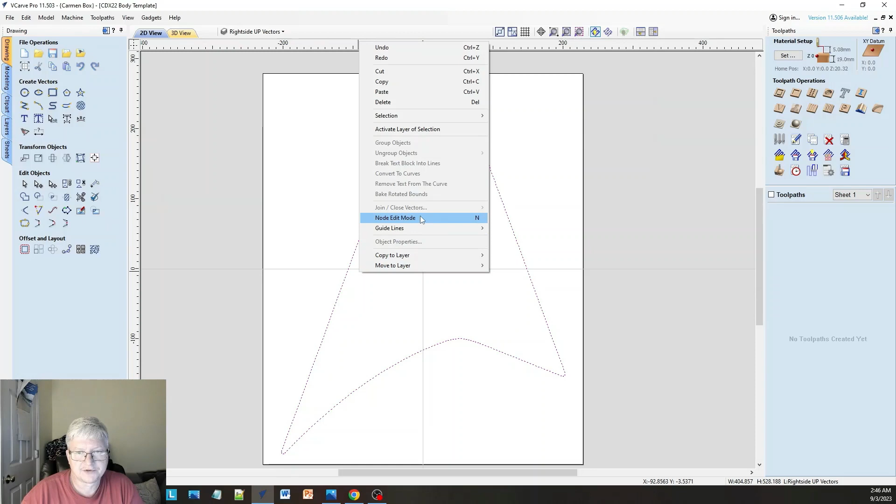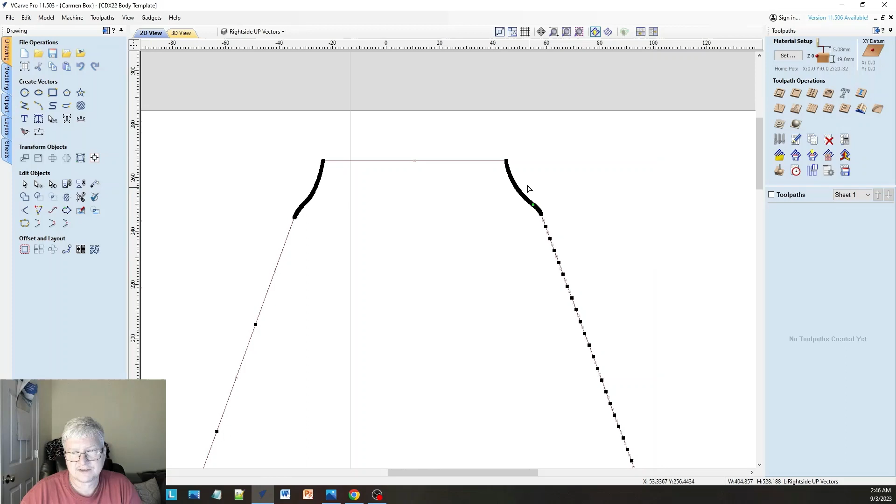This is very similar to what you guys had if you followed along. I'm going to take these vectors that we imported and go to node edit mode. If you look, you see all this garbage - this should be a straight line, but you see all these points, tons and tons of little lines and arcs. We need to get rid of that.

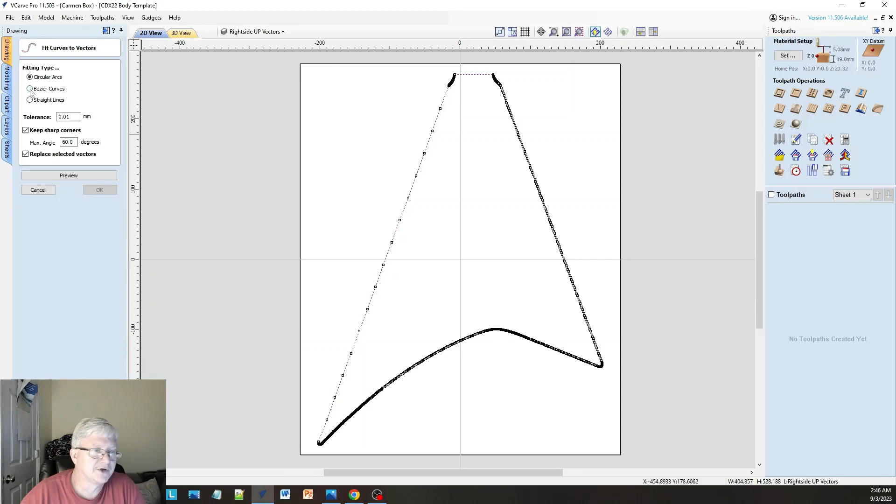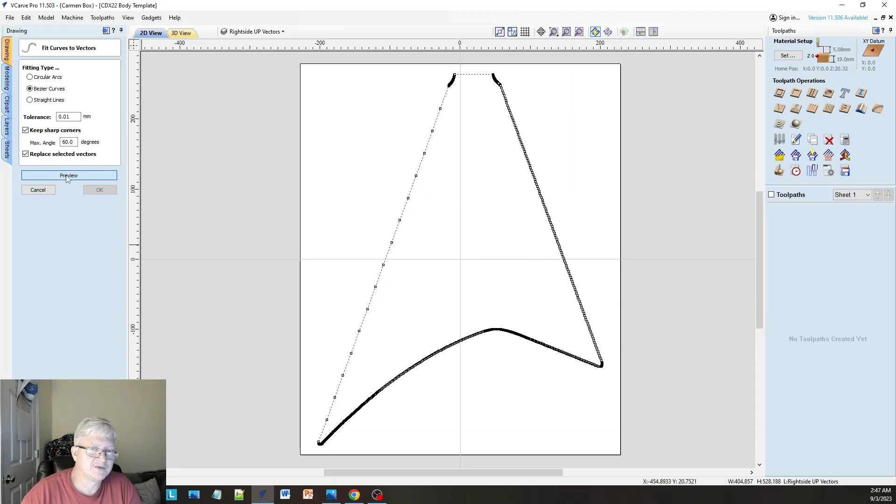How we rectify that is we highlight the vector, then go over to this tool here, the curve fit tool, and click on that. We're going to select Bezier curves and leave the tolerance at 0.01 millimeters. Some things you don't really have to be this accurate, but I like to leave it that accurate. I also like to select replace selected vectors. So we click this preview button, and this is what the software will convert the imported DXF curves to, and I'll hit OK.

Now if I click on that again and go to node edit mode, we have something really nice to work with.

Another thing I want to mention - you guys may not need to do this unless you're doing like me and repairing a guitar. If you traced a unit and followed along and just want to build your own guitar, you can go ahead and generate your toolpaths based on the video you followed in part 2. Just go back and do this - that's the only change you have to make, and you wouldn't have to do the engraving.

I'm doing engraving for a different reason. I'm repairing a Jackson X Series V, model number CDX22, that has a broken upper wing. For me to do a good job on this, I need my template to fit the body pretty good. It doesn't have to be exact, and it can be a little proud - the template can be a little proud of the body, but the body cannot be proud to the template.

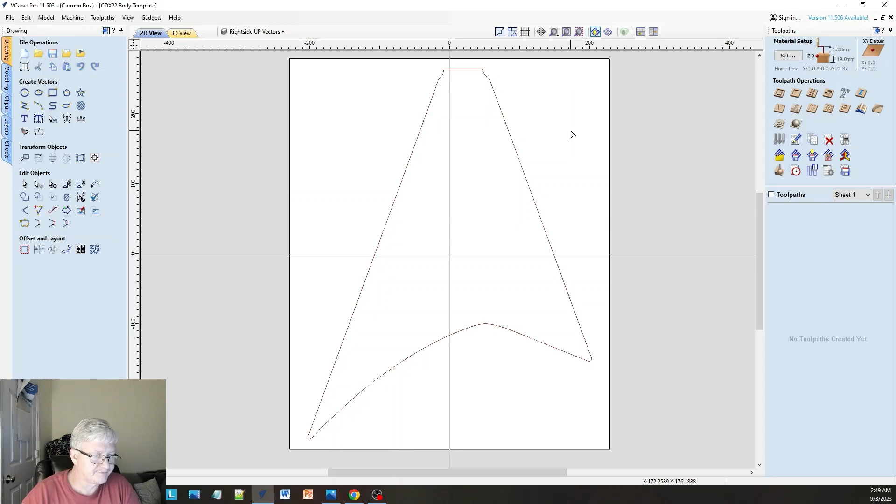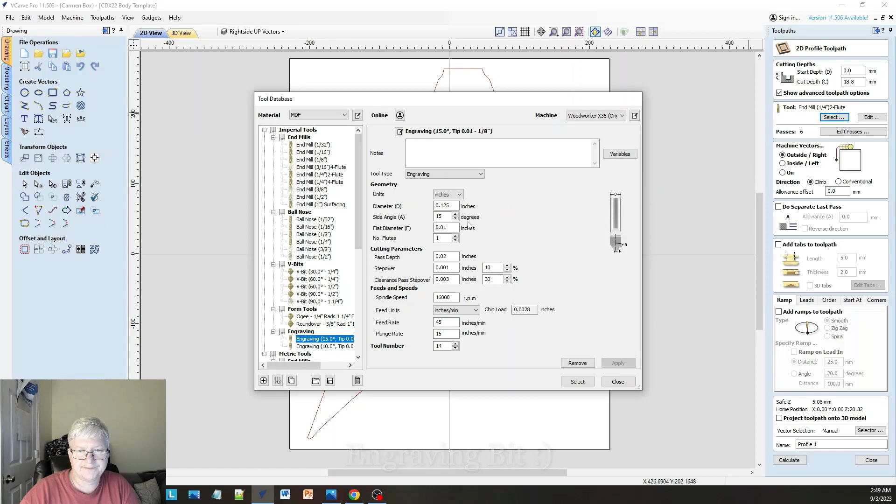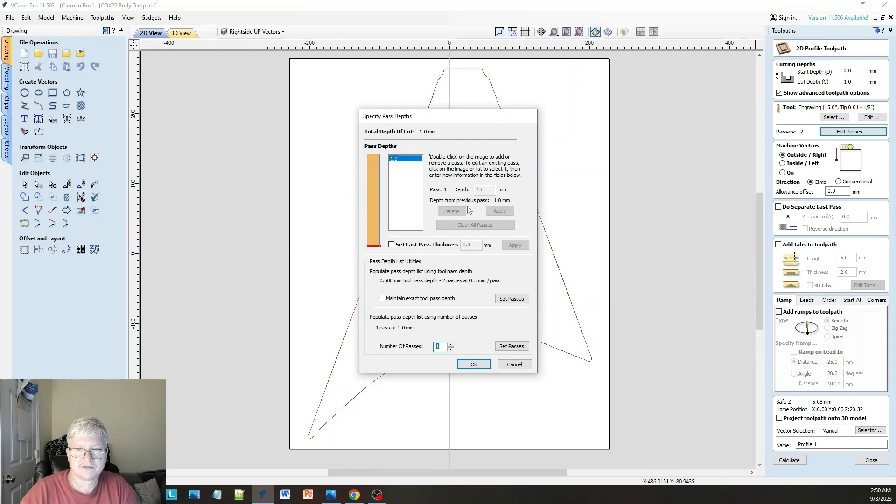So what I'm going to do is generate a toolpath. I'm still going to use the profile toolpath, and I'll select a 15-degree engraving bit. I'm going to select that tool and change my cut depth to 1 millimeter - that should be enough. I'll go to edit passes, delete one of those passes, and just go 1 millimeter in one pass. It should be fine.

Now unlike your toolpath where you'll be carving on the outside to keep this template, we want this to be on the line. We'll call this engrave, and we hit calculate. Now we can preview, and there we have where we can see we're tracing the body.

The purpose here is I want to etch a line on this thin sheet of MDF, then set the damaged guitar on it and take measurements to see how close I am. Depending on how close I am, I'll either go ahead and carve my template, or I'll edit these curves.

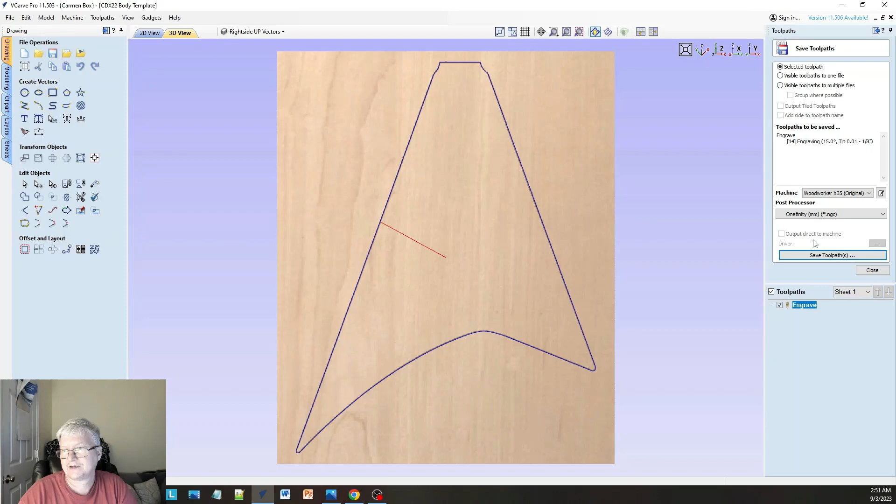For now, what I'm going to do is generate this engraved toolpath, or generate G-code from that toolpath. I'm going to hit save, and we're going to save the selected toolpath. We'll call it engrave, take two - but you can call it whatever you want. Then now we'll have G-code.

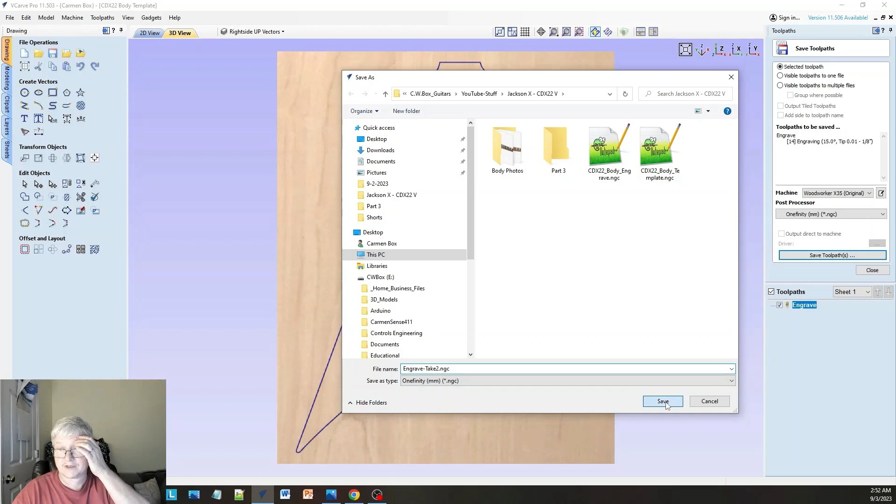We'll go ahead and do our carve. I want to center this piece based upon my center line for my workpiece that I marked earlier. I'm just going to run this down - it doesn't have to be exact. I'm going to tap this over a little.

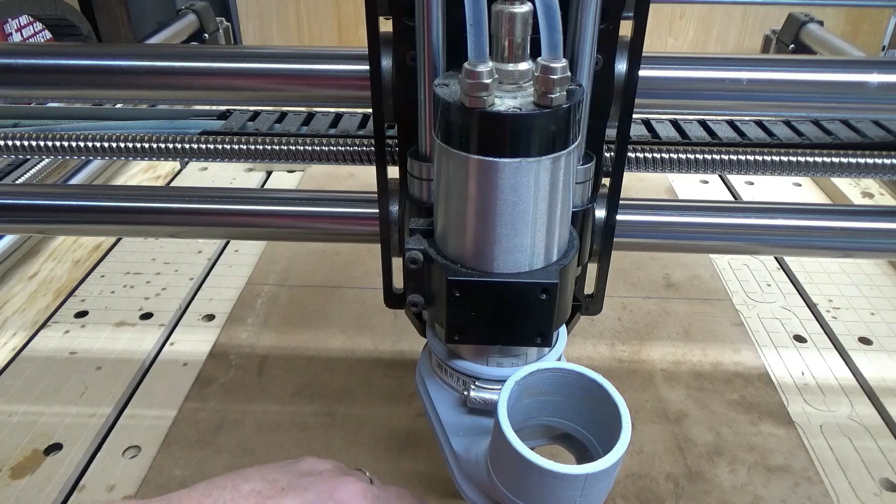And it's pretty close, so I'm going to tighten these clamps up. I'm not going to put them terribly tight, because now I've got to do the same thing at the far end of the table.

We'll go down here to the far end. See, it's going to be off a little bit down there too. But like I said, where it is now, it's probably plenty close enough.

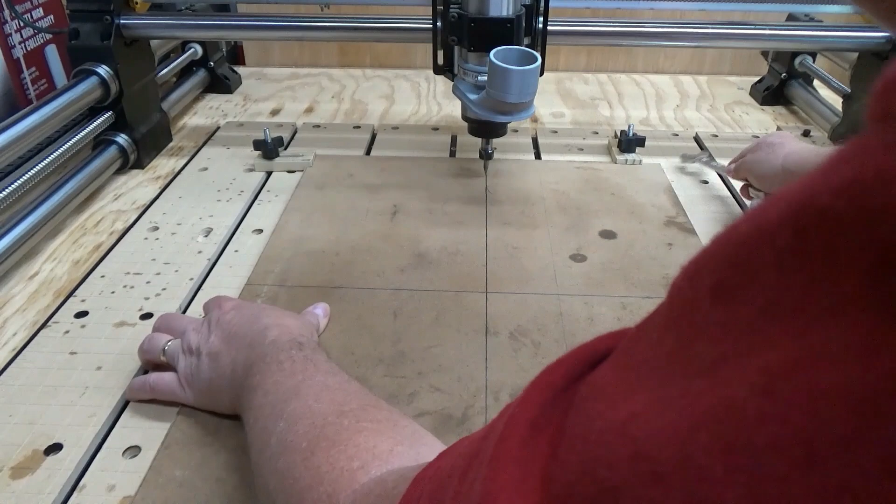Okay, so then now all we have to do is come down here to the center. Slow it down a little bit. And that'll be close enough. And that'll be the Y0.

Z0, and then now I will raise the Z up just a little bit, and we will do the engrave. We turn on the spindle. And we'll go for it.

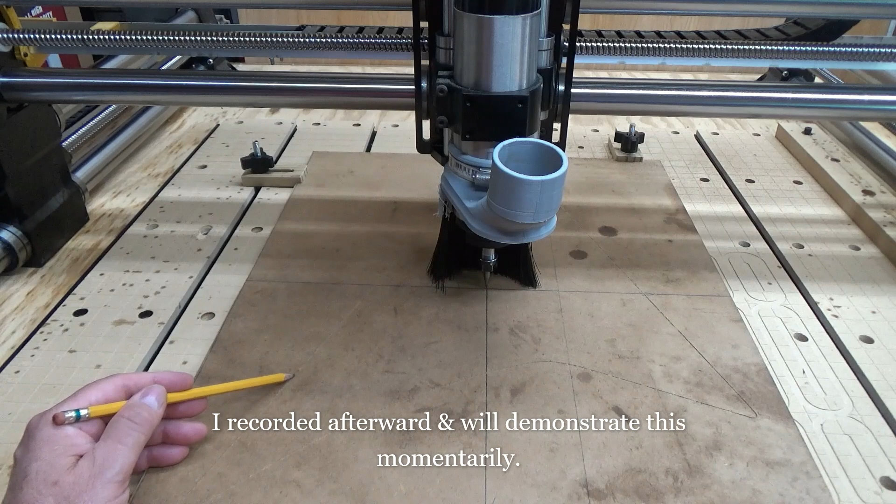And what I did was I wrote down the X and Y coordinates when I measured along that vector, 430 millimeters, and then I dropped a circle with a 1 millimeter radius at that point, and then I came inside here and inserted a point onto my vector, and then I dragged that point out to the outside of that circle, which pulled that segment out 1 millimeter, meaning now there's a slight contour, and then now this comes out a little bit. It's about 1 millimeter, and it should be almost directly even with the body.

If it's a little proud, that's not a problem. I can sand that, but it can't be inside. The body can't be proud to the template.

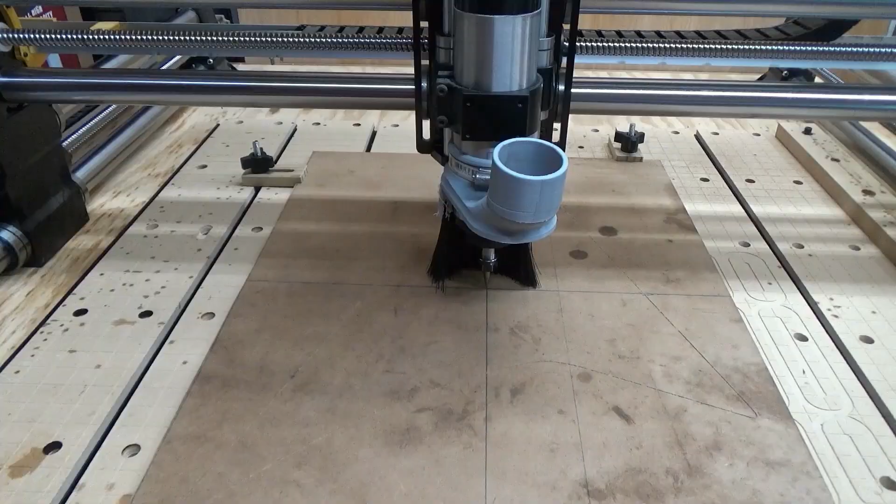Okay, so after we engraved the MDF to proof the toolpaths, I did notice a couple of little problems. Overall, the toolpath looks good, but there are some things that need to be fixed.

And one of the things that I noticed was on this side, where the wing is actually broken, 430 millimeters from this point along this vector, we're inside roughly 1 millimeter.

And so what we're going to do now to fix that is I'm going to take this measurement, go up here and trace down this line. I'm going to stay on this vector until I get to 430. It doesn't have to be exact, but close. The closer the better.

Yeah, let's do that. 430.41. Okay, so I have my X and Y distances, and I wrote those down.

And now what we're going to do is we're going to turn that tool off. We're going to draw a circle, and we're going to place that circle, a 1 millimeter radius circle, with the center at the X and Y position that I located with the measuring tool. And this is what we end up with.

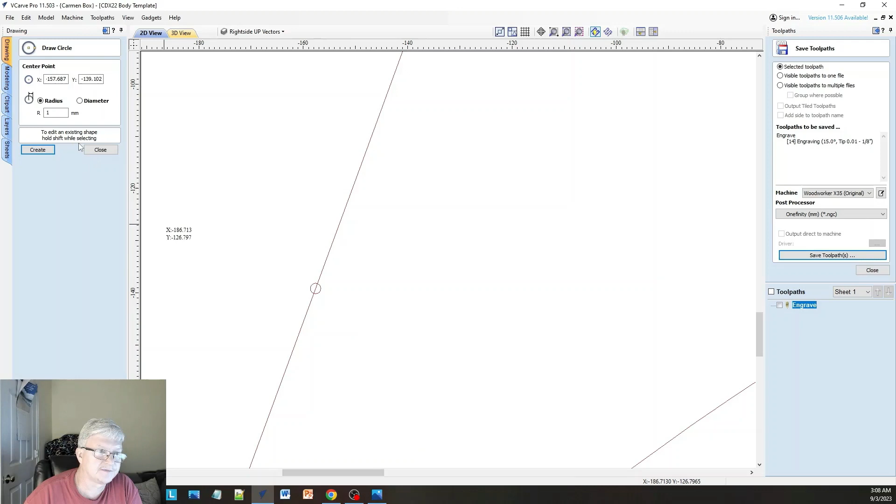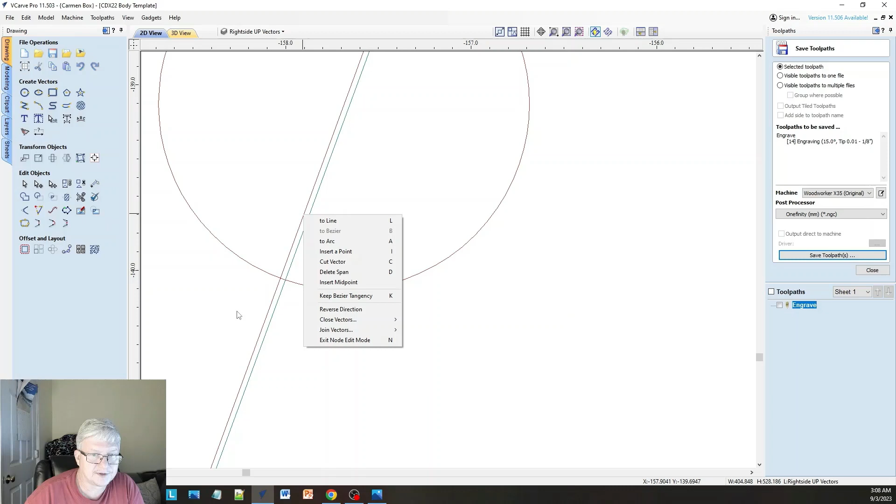Okay, so now that we've done that, we go back to this vector, and we are going to go to node editing mode, and then we're going to insert a point, and now we're going to take that point and we're going to drag that point.

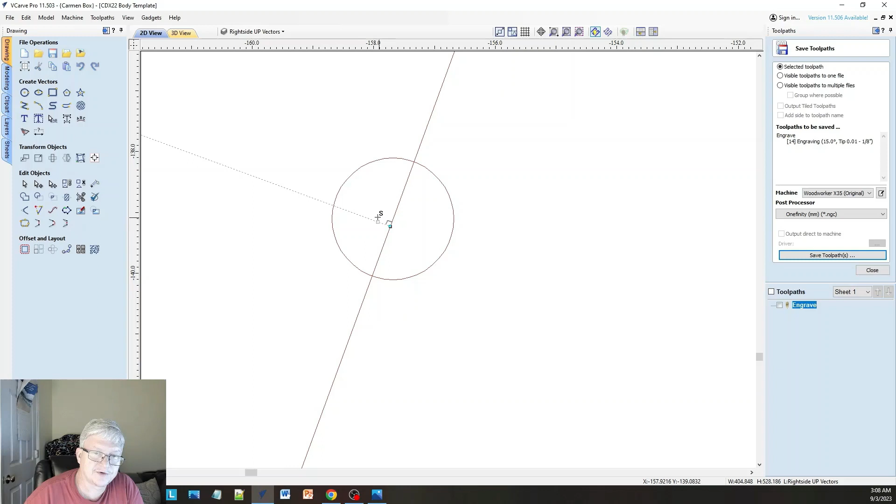Until we hit the outside perimeter of that circle we just drew. All right, so now that's going to pull this side out so that this point won't be affected. So all of this should still be aligned.

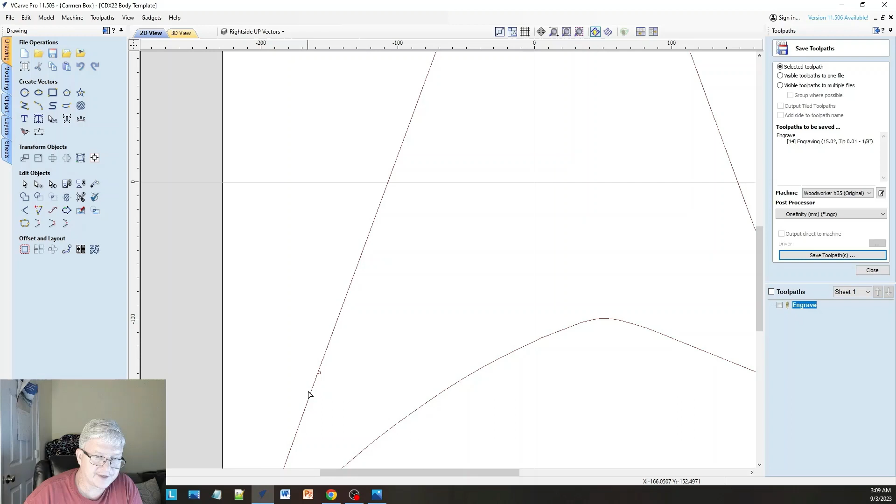Which was aligned with the unit. Now we should be pretty close. And the other thing that I noticed, and we can go ahead and delete that now, is that the entire thing needs to be offset about half a millimeter.

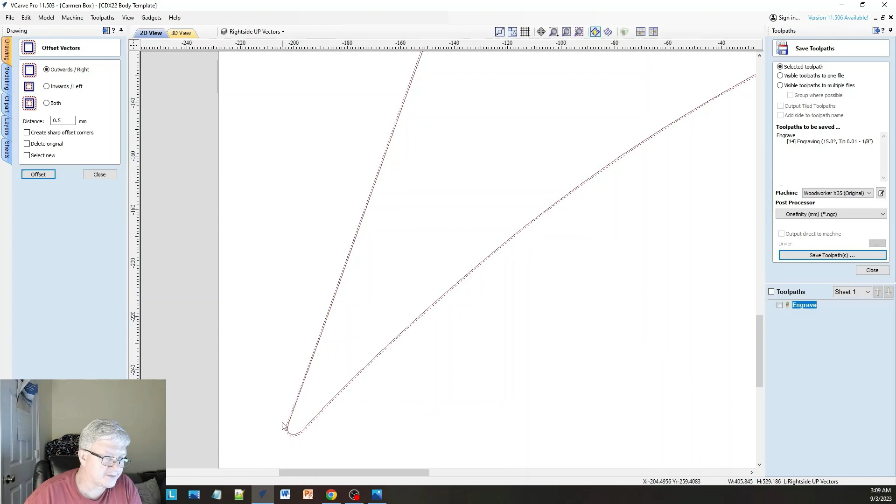So we're going to go here to this offset tool, and we're going to say outward, and we're going to say half a millimeter. All right, so now we have this new vector. That new vector is going to be our new tracing point, but we're not going to trace. It was extremely close enough that I know this is going to be good.

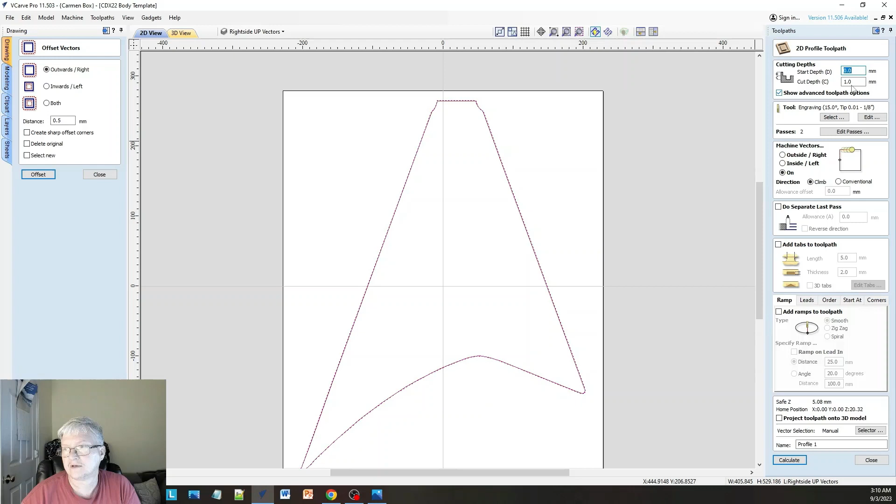So now we're going to take that new vector that we just created. We're going to close this. We're going to go back to the profile toolpath, and we're going to go 18.9 millimeters deep because it's a 19 millimeter piece. We're going to select a tool, and we're going to use the quarter inch 2-flute tool, and we'll select that. We have 6 passes.

We're going to go to the outside because this is the segment that we want to keep. We're going to add some tabs. We hit edit tabs. I'm going to tell it to avoid the corners, and I'm going to tell it to add 2 tabs, and then I'm manually going to go up and pop 2 tabs in here. And I explained earlier what that was for. Then we're going to close.

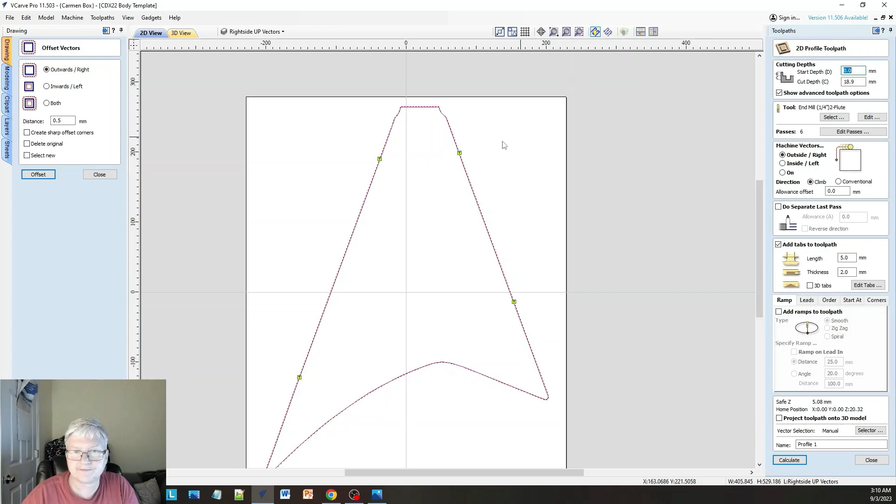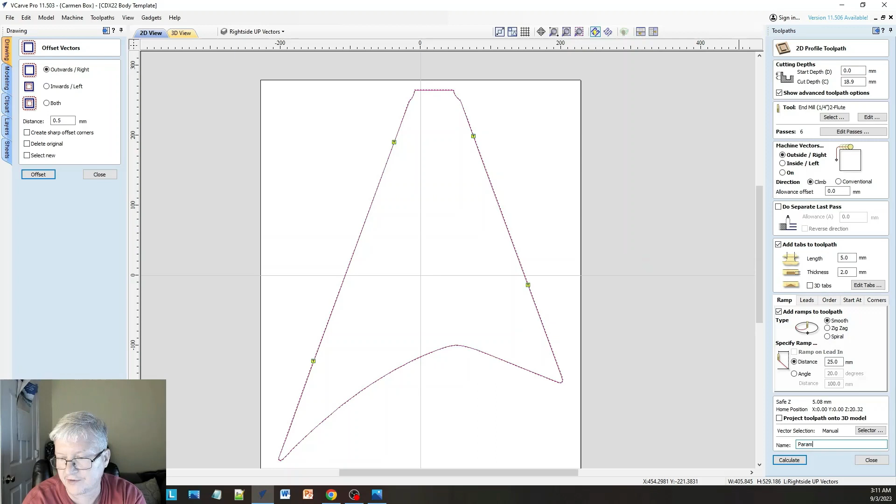So now we're going to have the new tool path, which is 1 millimeter larger over the entire instrument. It will be 1.5 millimeters in this segment here, which means that we should be corrected now. Now we're going to add a ramp, smooth ramp, for a distance of 25 millimeters, and we're going to call this CDX 22, or well, first let's just call this parameter. Calculate. Now we can preview the path, and there we have it. And this should be very close to the actual instrument.

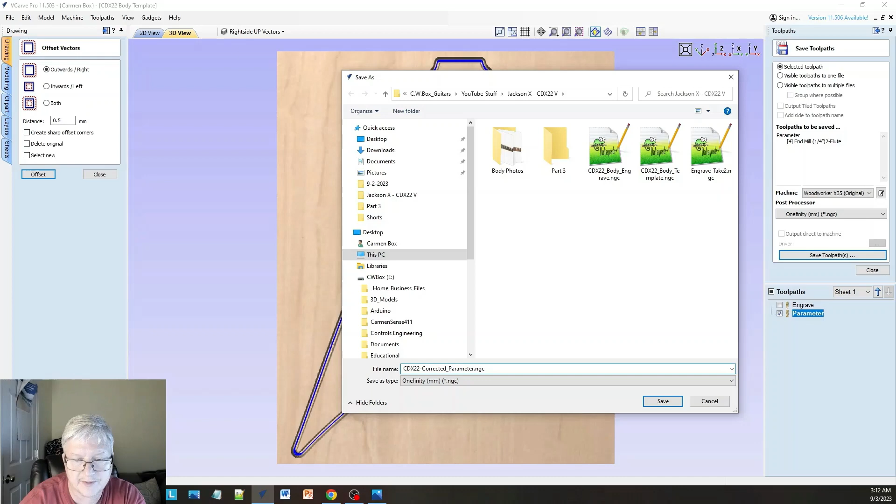So now what we're going to do is we're going to select the perimeter, and we're going to go save toolpath, and we're going to save that toolpath, and we're going to call this toolpath CDX 22 corrected parameter, and save.

Okay, so now we're going to go back to the machine, and we're going to carve this on the 6 millimeter. Oh, this is 6 millimeters, not 19. So we're going to say 6 millimeters. Calculate.

And now save it. That would have been bad. I'm tired. It's been a long night.

Corrected parameters. Yes. Okay. Now we're going to go back to the machine, and we're going to carve this.

Now all I did was change the mill out, and I did decide to go with this. I decided to go with this other mill, the 2-flute. And now I'm just going to lower this down till it touches.

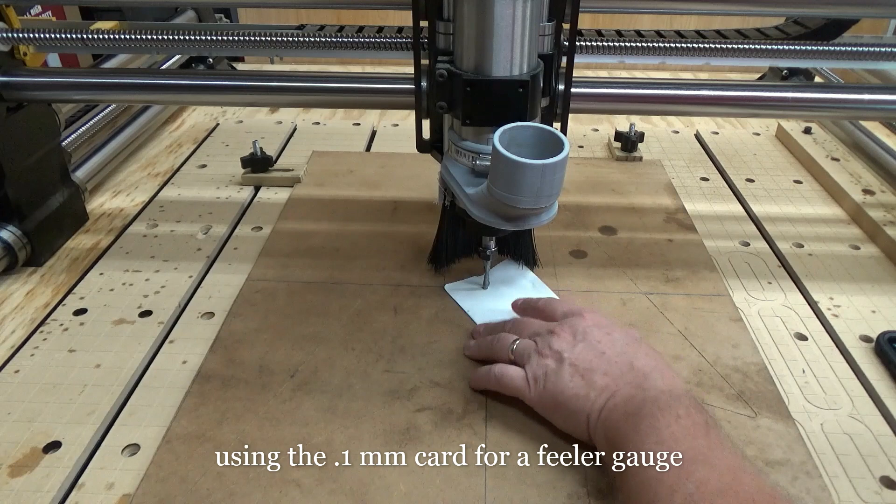Alright, so now that I feel that, and this is 0.1 millimeter, this is 0.1 millimeter thick. So now that I've done that, I can step over to my controller and put it on 0.1 millimeter and bump the Z, and it'll go down 0.1 millimeter, and that will be my new Z0.

Okay, so that's all I've done, and now I'm going to raise this up, and this is going to probably get a little bit messy, so I'm probably going to have to give you guys a little noise. And then the next thing is I load in the program, and then I turn on the drive, and I think this is supposed to be 230.

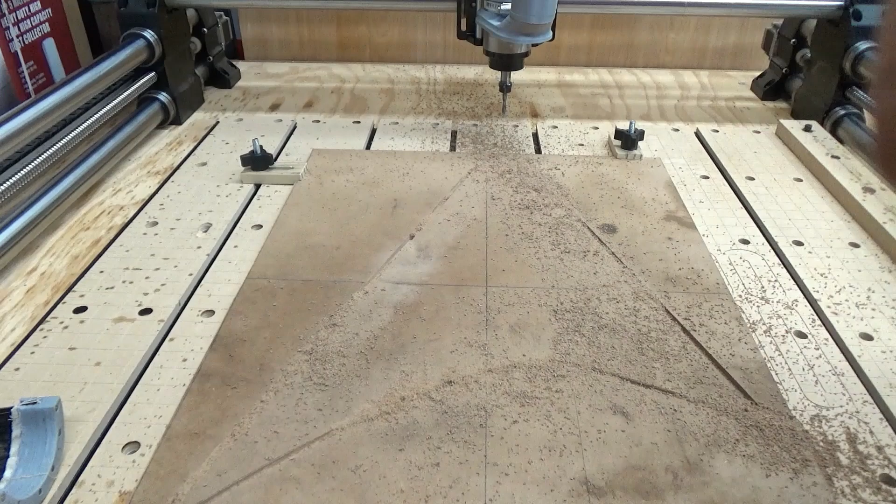So that is the trial template. Okay, so everything looks good now. So the only thing that has to change is the thickness.

So we're going to go to perimeter, and we're just going to modify what we had. And I'm going to go 18.8 to leave a little bit at the base of the part, so I don't like hitting my waste board if I don't have to.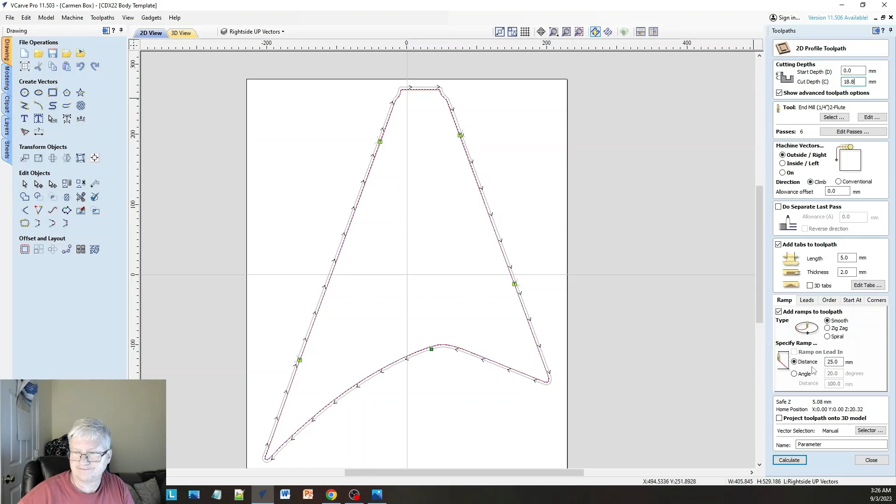Everything else remains the same, and then we preview it, and then we hit close, and then now we select that perimeter path, save toolpath, and there we go. We're just going to use that same.

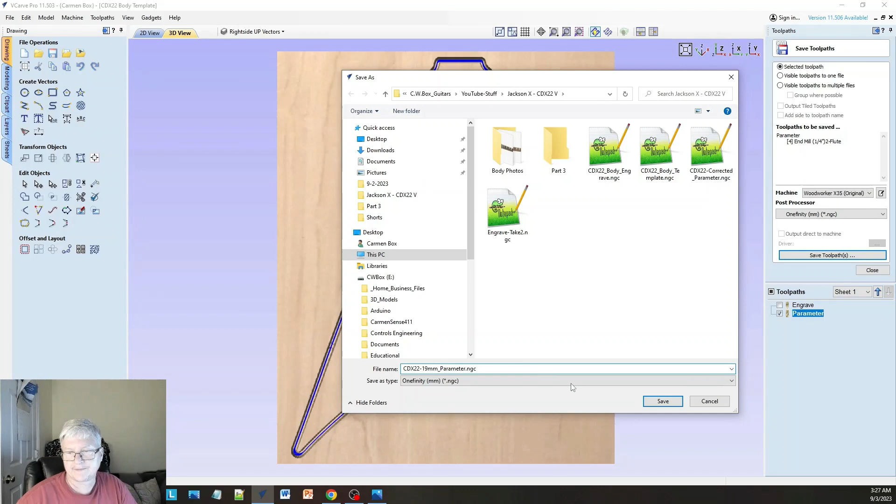In fact, we'll call it 19 millimeter perimeter, and that's what we're going to run now. So we'll be back at the machine carving the last piece, and then we will be done.

And now we are ready to carve the actual template.

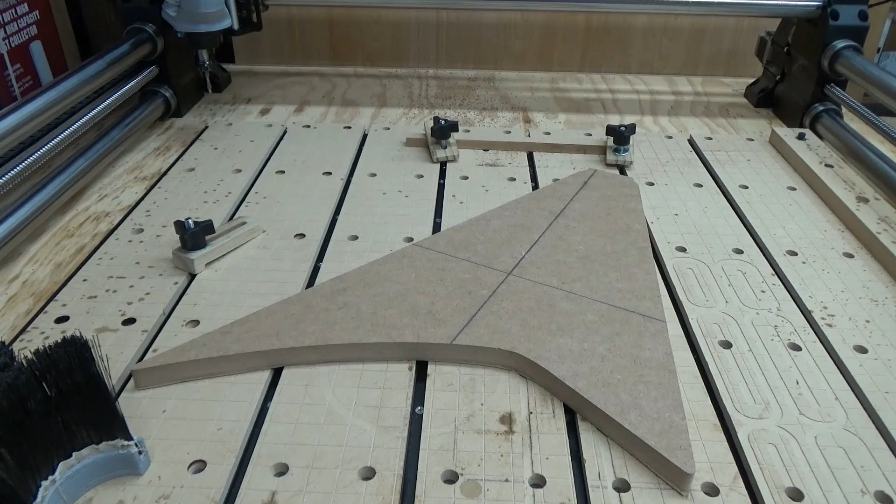And there it is, minus cleanup. And that is the template that I'll use for repairing the CDX22 X Series Jackson V.